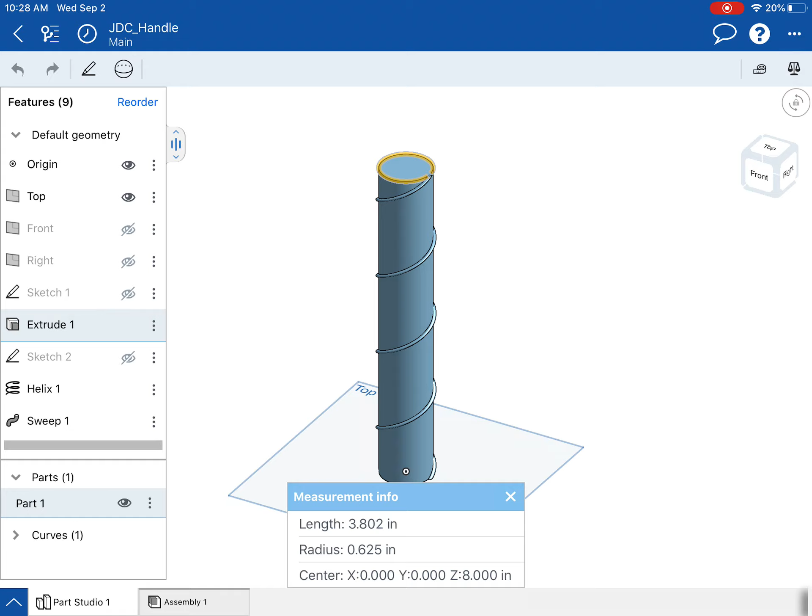It's interesting that it gives me a radius. Usually it'll be a diameter, but 0.625. So if we double that, we can get the diameter, which is going to be 1.25. So diameter 1.25. Remember that. So we're going to go back.

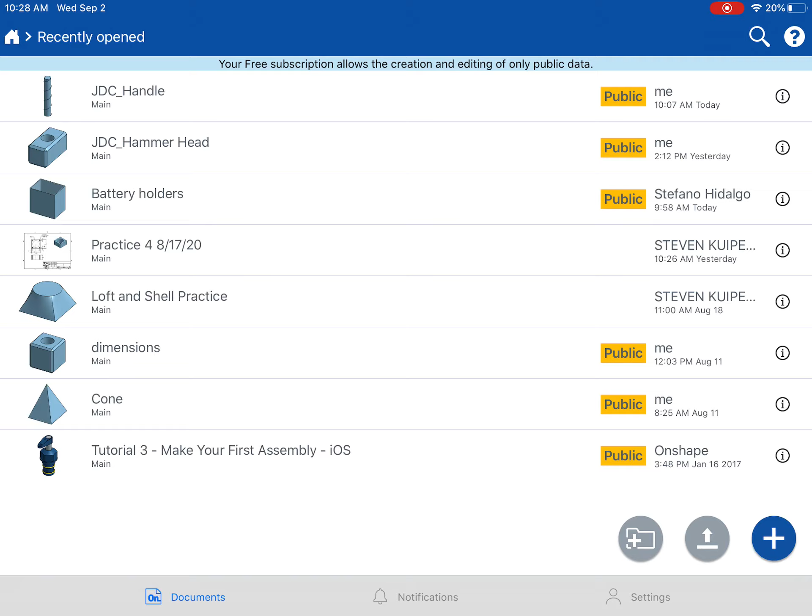I'm going to make a new document. Hit the blue plus sign. And remember initials, and then underscore. And we're going to call this Pummel. Like that, I think. Okay. And then we're going to now model our pommel.

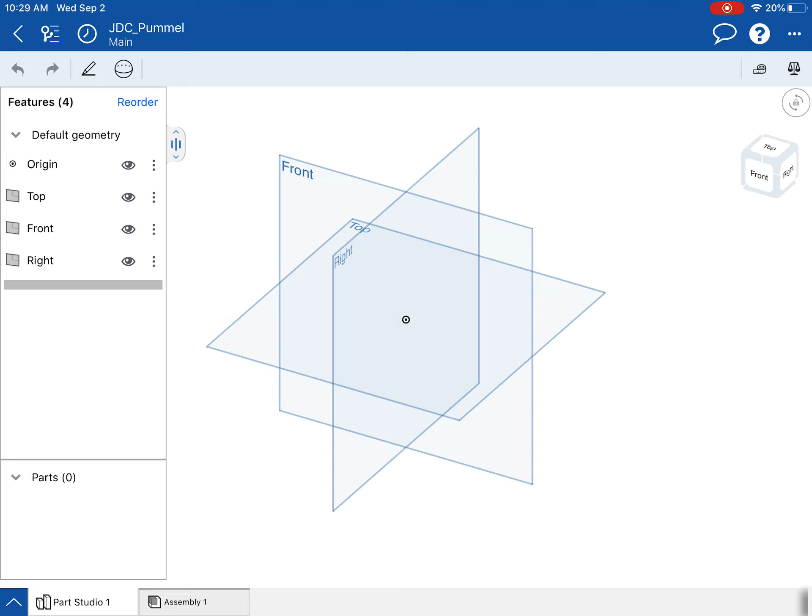Let's see. Yeah, let's start on the top again. I'm going to start on the top plane. So I'm going to turn off my front and my right. Remember, you can turn the visibility on and off of those anytime you want with the tapping of the eye next to whichever plane you want.

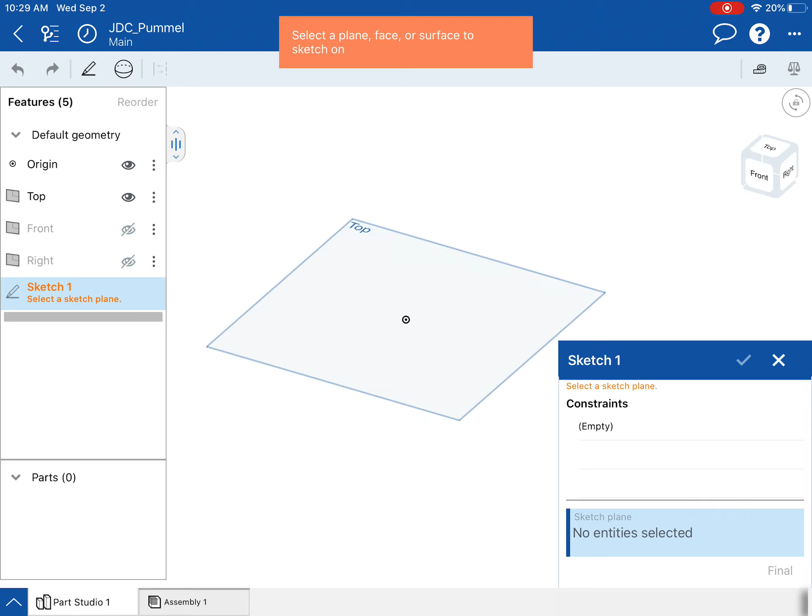And I'm going to start a new sketch. The pen icon, the 2D tool, I'm going to tap on that. It's going to say select a plane, select a face or surface. I'm going to tap on the top plane. Once I do that, it opens up the 2D menu where I can start sketching.

And the first thing I want to make is a center point circle. That's going to be this one. Tap on that. I'm going to tap on the origin. Remember, always start on the origin for your first sketch. Tap on the origin. I'm going to tap and drag, and randomly create a circle. I'm going to now dimension that.

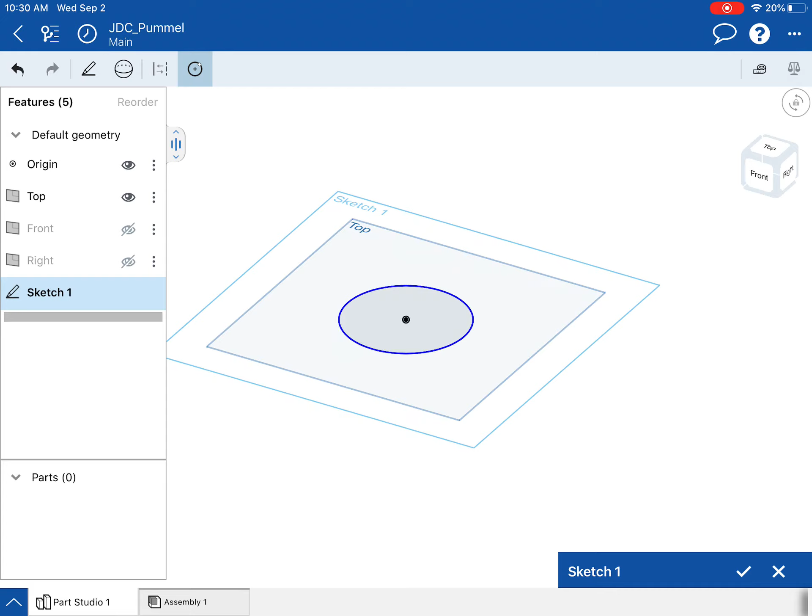Remember, dimension is going to be underneath the 2D tool, the pen icon here. I'm going to tap on the pen icon, and dimension is located right here. Tap on that, and then tap on the edge of the circle. Once that happens, the number comes up. I can tap on this and change that diameter.

Now, the handle diameter was 1.25, so that's what we're going to make this as well. Actually, let's do a subtraction extrusion later on. So let's make this a little bit bigger. So we're going to do, let's say, a diameter of 2 inches. So we're going to go 2 and then the green check mark.

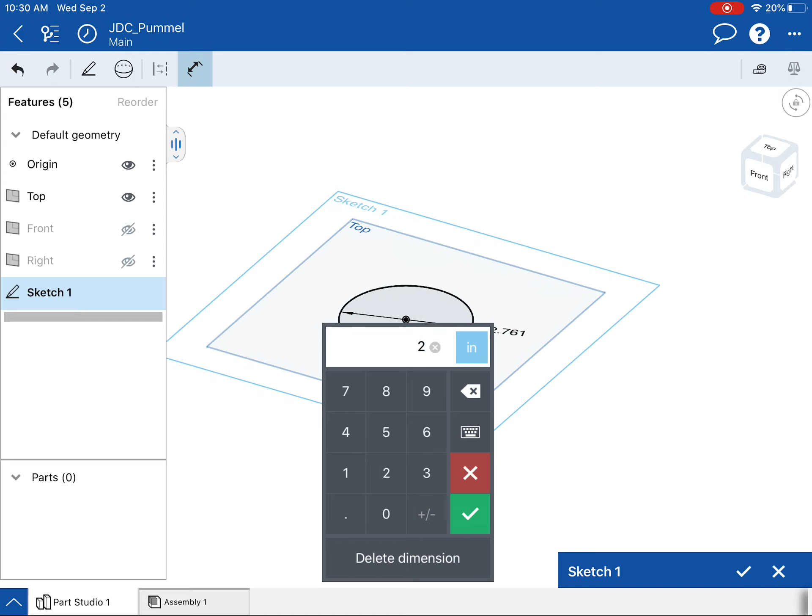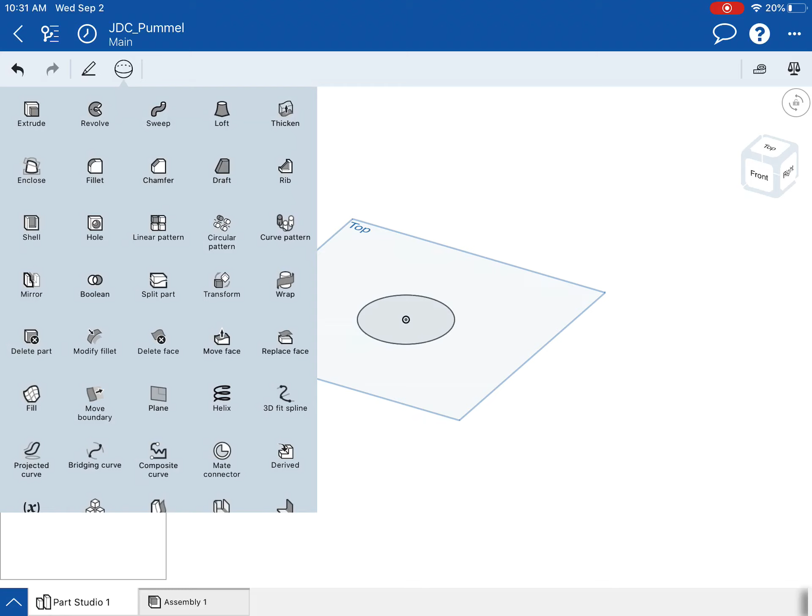And then we are going to draw another circle. Let's practice with extrusion. First, I'm going to extrude this. So we're going to finish the sketch and extrude this. So I'm going to tap on the sphere icon, the 3D tool, and go to extrude.

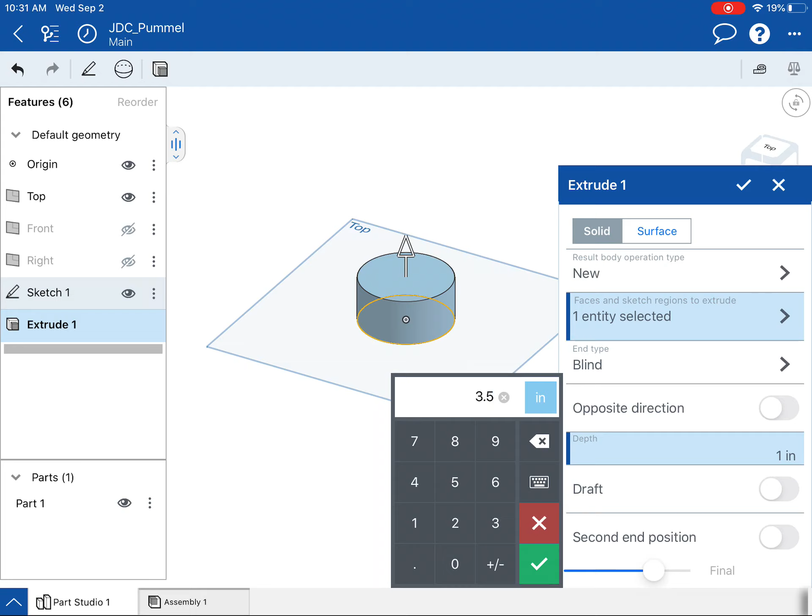I tap extrude. I'm going to tap on the circle I made, and it knows that I want to extrude that circle. I'm going to extrude this up about 3.5 inches. I'm going to hit the green check mark. And now I'm going to create a new sketch on the top surface of this cylinder.

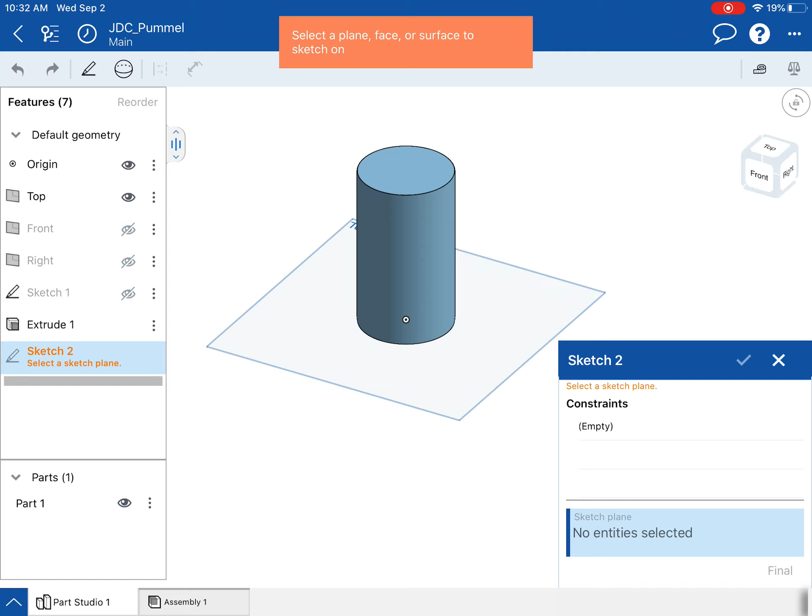So I'm going to make a new sketch by tapping on that pen icon. Once I do that, it says select a surface, select a plane, select a face. The face I'm going to select is the top of the cylinder. Once I do that, I'm going to be able to draw another circle inside of this cylinder surface.

So I'm going to go to center point circle, which is right here. And I'm going to do my best to tap on not the center, just because I want to show you guys something. So I'm going to tap like over here, not the center of that cylinder. And then I'm going to tap and drag to make this circle.

And you can see that square; there's going to be some snap-ons where it snaps to a point. Right there, it's snapping on so that the edge is connected to the center of my cylinder. So I don't want that. So try not to have it snap on anything. So right here would be good, and right here would be no good. You don't want any kind of constraint added to your sketch yet.

So that would be like a geometric constraint. We don't want that just yet because we're going to be adding our own in just a second. So right there, I'm going to let go of my circle.

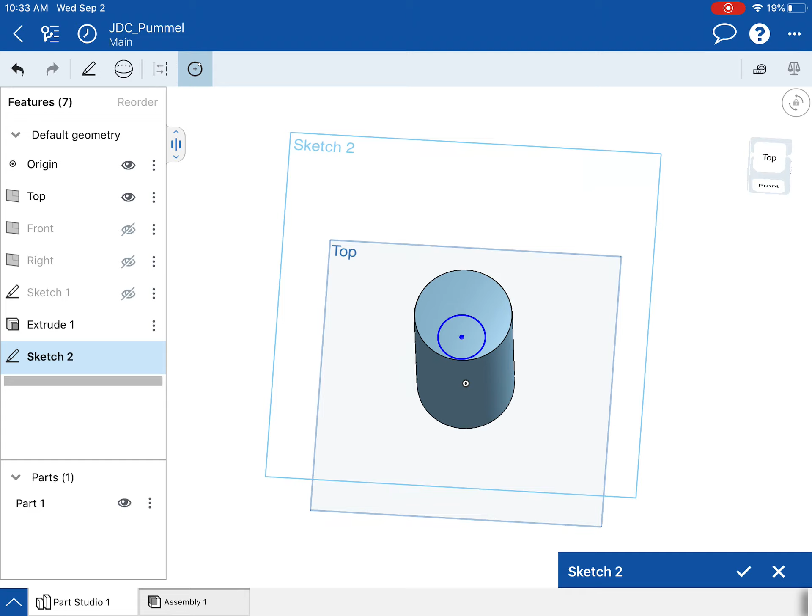Again, if you mess up, if anything happens like that, you can always undo. Undo is at the top left. You can see right there the arrow going back. If I tap that, the circle's gone. I'm going to have to draw that again. And tap, draw, and again, I'm getting some snap-ons.

Right there's good. So first thing I want to do is I want to make this go to the center. So I'm going to add a geometric constraint. I want to snap on the center point of that small circle. I want it to be concentric with the bigger cylinder.

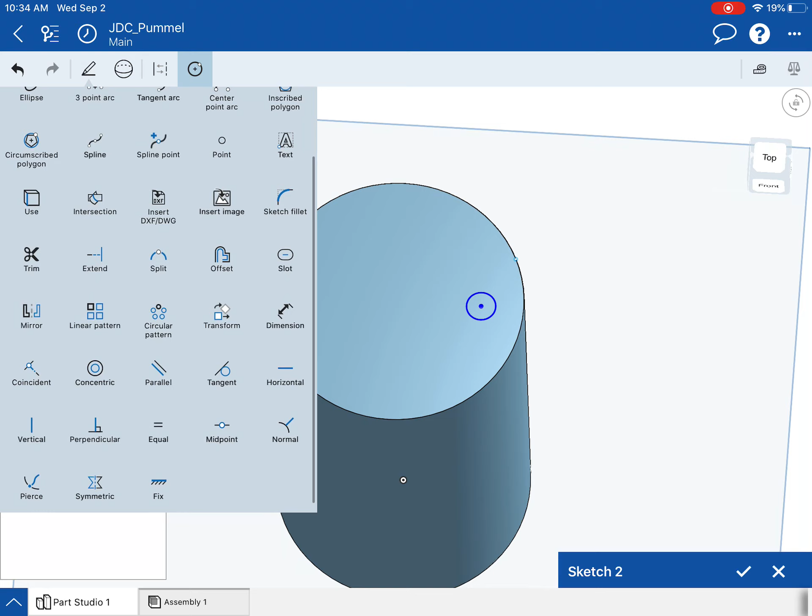So what we're going to do is we're going to add a geometric constraint by going to Sketch, the little pen icon, 2D sketch mode, and somewhere in here at the bottom there's going to be this concentric tool. You can see it right here. And that allows, if you have two circles, they will make it so that the circles share the same center point. So if I tap on concentric, it says a constraint must involve something from the sketch.

So I'm going to go to that center point and, whoops, hold on, that didn't work. Let me try that again. So I'm going to tap on the circle first. Maybe let's try that. So I'm going to tap on the circle, and then I'm going to go to 2D, and then I'm going to go to concentric. What if I do it like this? There we go. Okay, so that took me a while.

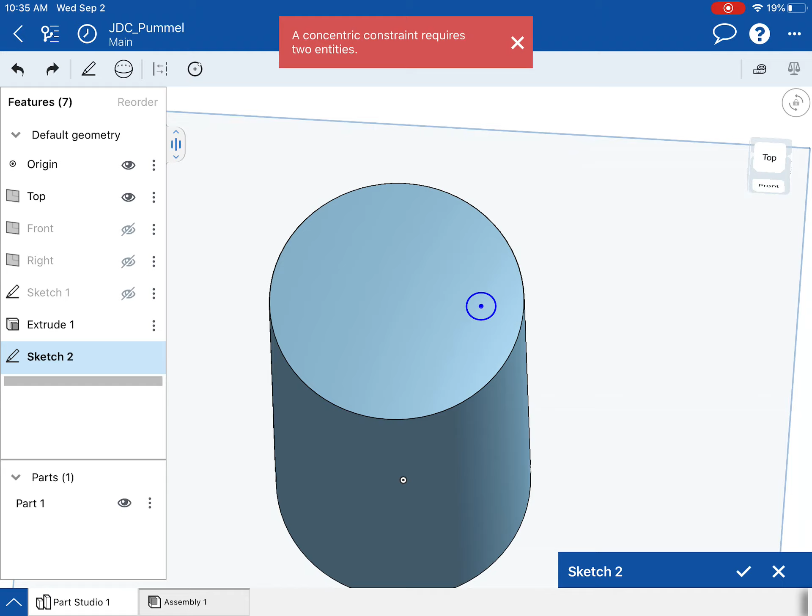A little bit different than Inventor, right? So I'm going to undo that one more time. So say it's off-centered. I guess with the proper order of things, proper order would be to select the two geometric shapes that you want to add a geometric constraint to.

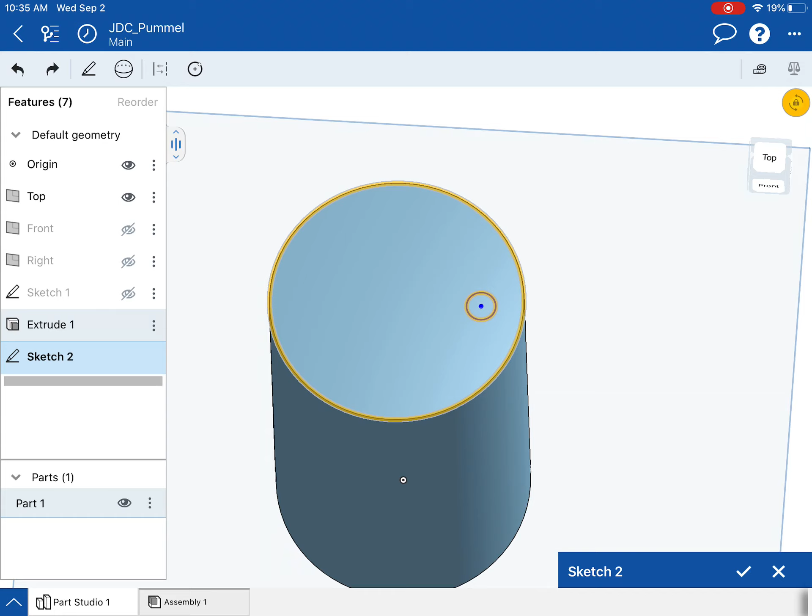So in this case, I'm going to select the two circles. The geometric constraint that I want to add for those two circles is I want them to be concentric with one another. I want them to share the same center point. So once they're both selected, then I can go to the pen icon, the 2D tool, and now I can tap on concentric. Once I do that, watch, it snaps on to the center. That's all I wanted. I know it took a little bit, but that is what we need to do.

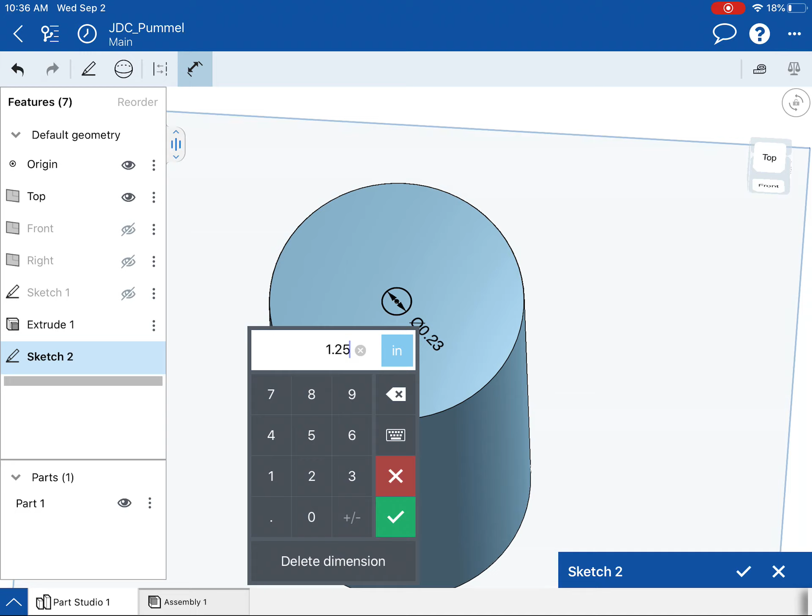So now, after that, now I can go ahead and dimension this. So I'm going to go back to my pen icon, 2D tool, dimension. I'm going to tap on that small circle. It's only 0.23 in diameter, so I'm going to change that. Remember, our handle is 1.25. So I'm going to change that to 1.25, green check mark, and there it is.

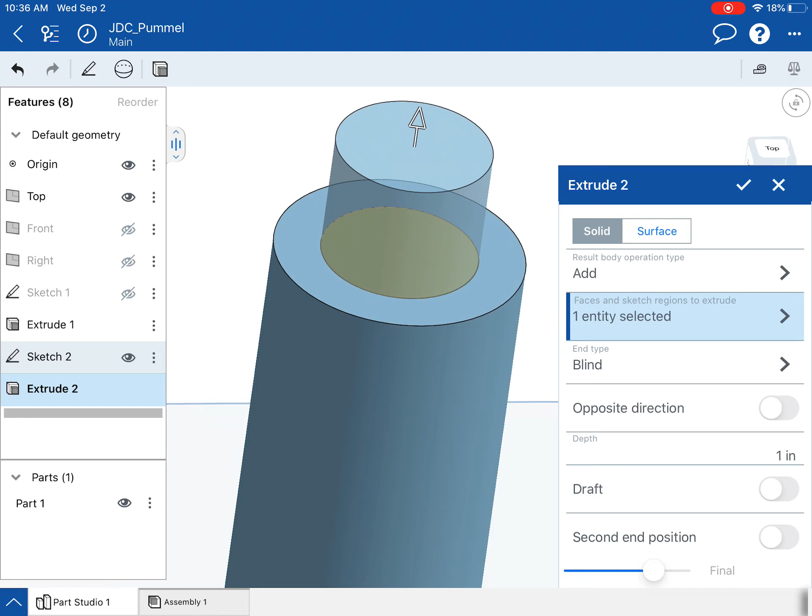Now what I want to do is I want to cut that away because I'm going to insert the handle into this pommel. So what I'm going to do is I'm going to extrude. So I'm going to use a 3D tool, the sphere icon. I'm going to extrude. Onshape is pretty smart, and it knows I automatically want to extrude that circle.

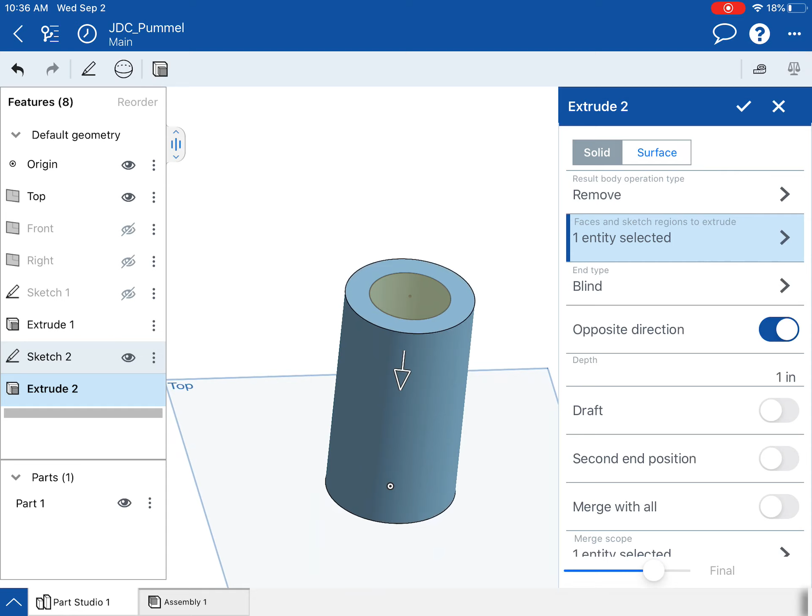The one thing it doesn't know, though, is I want to take away. I don't want to add. So over here, result body operation type, where it says add, I'm going to tap that, and I'm going to be able to change that to remove. It's going to then move it down, and since we extruded this 3.5, how about we extrude cut this away 2.5, so there's about an inch left at the bottom. So we're going to type in for depth, and so once I change direction to remove, I'm going to depth instead of 1, we're going to do 2.5.

And blind is fine as the end type. So what blind is, a blind hole. If you look down that hole, you can't see through it. You're technically, it's a blind hole, right? You can't see through the other part. A through hole would be if you could see through it, they'd be extruded all the way through.

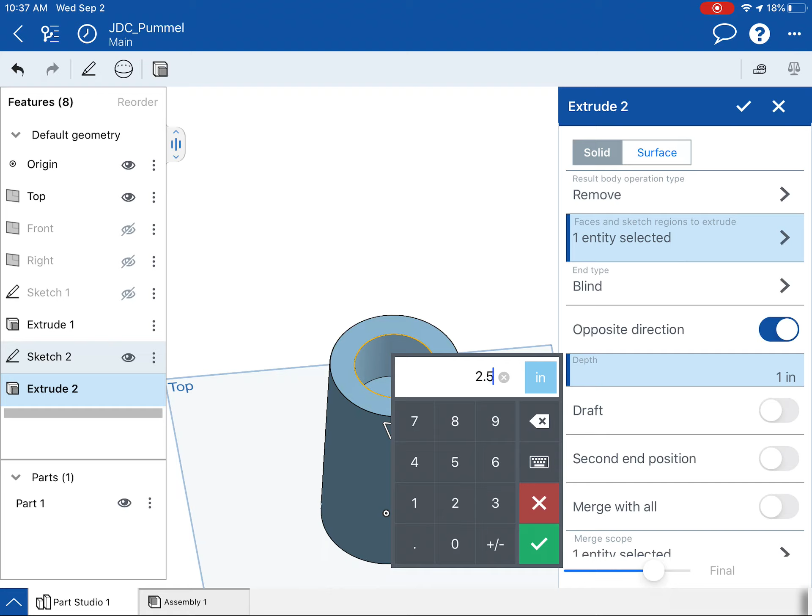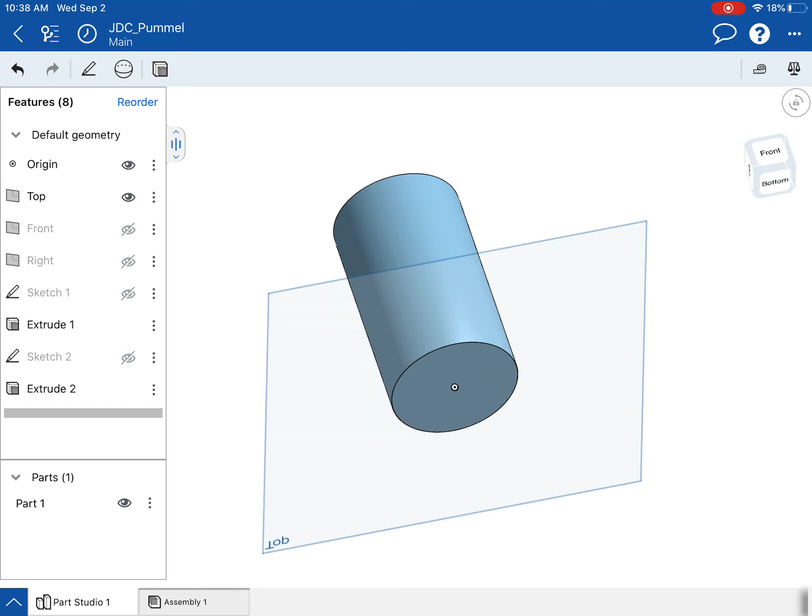So I'm going to make it blind hole, depth 2.5, green check mark, so that extrudes it down just enough so that my handle can fit in there. And then again, just like everything else, I'm going to make it look pretty, add some detail to it. And what we're going to do here is we are going to make a circle on the bottom surface. So I need to make another sketch. I'm going to go to my pen tool, and I'm going to tap on the bottom surface.

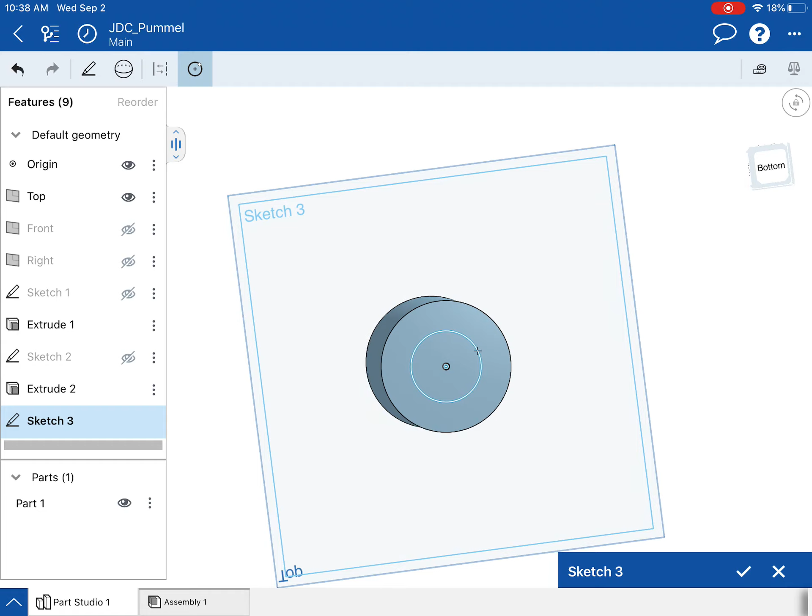Because we have the origin point, we're going to use that to our advantage with our center point circle. We'll start on the origin, tap and drag to make a random size circle, then go to dimension and tap on that circle to dimension it.

Let's say 1.25, and we're going to hit the green check mark.

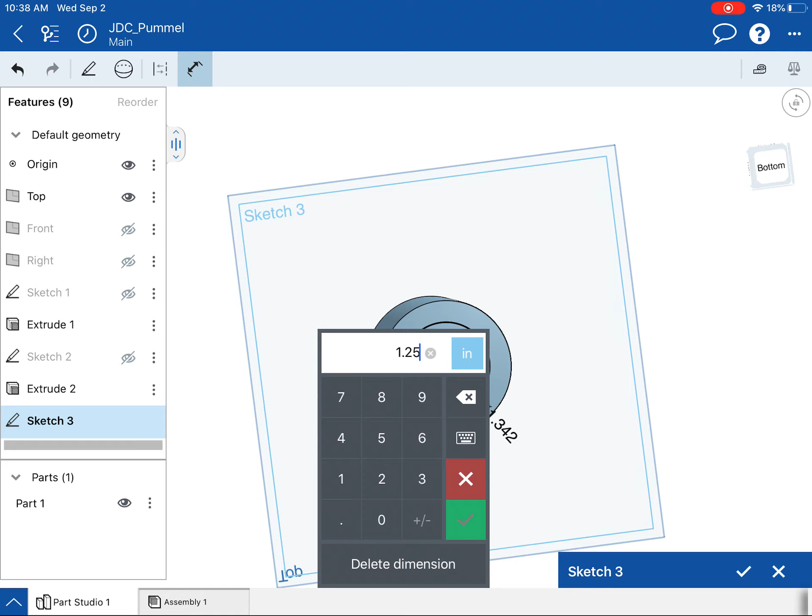Now I'm thinking that might not be big enough. This is what's really cool, you can always go back to your dimensions and change them again. So that 1.25, I can tap on it again, maybe double tap, triple tap I think, and change that to 1.75, then green check mark again.

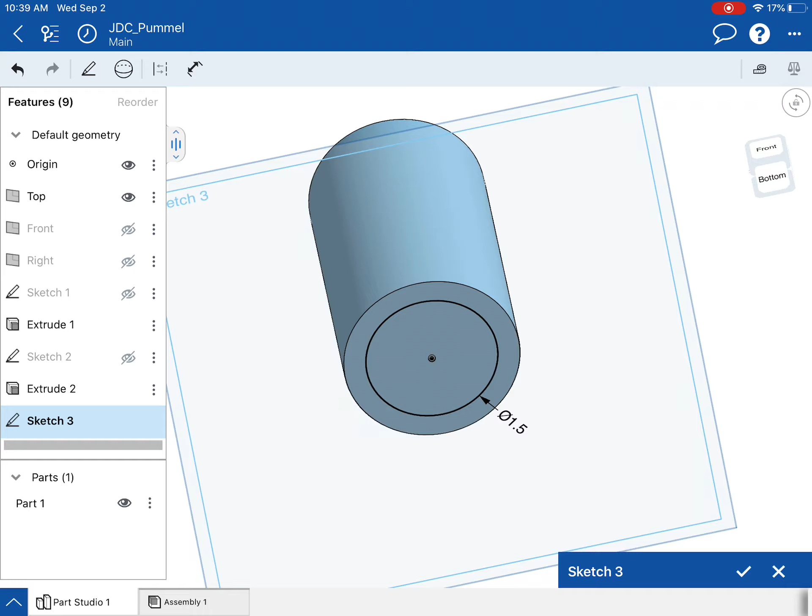Now it's too much. How about 1.5? That looks perfect. So now 1.5 is the size of our new circle.

What we're going to do is extrude. We're not going to extrude this inner circle, we're going to extrude the ring around it. You'll see in a second, I'm going to go to extrude.

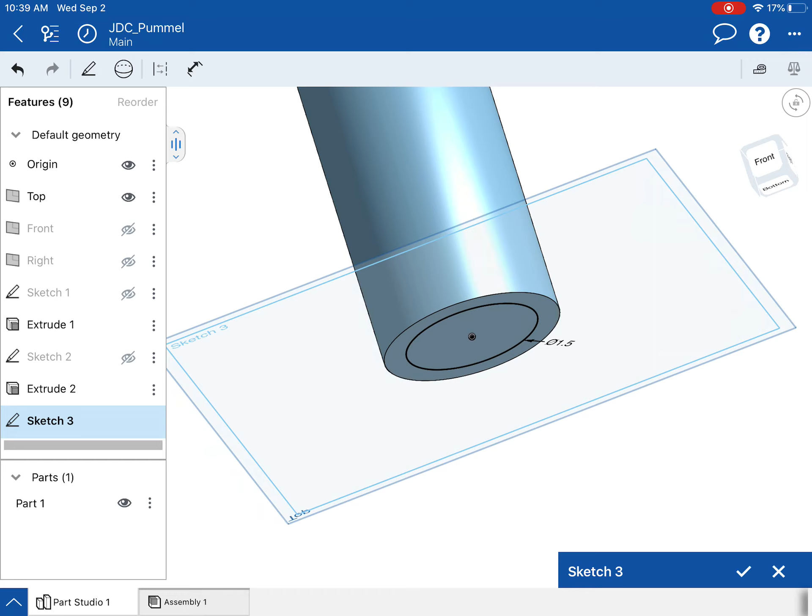That's a 3D tool. I'm going to click and tap on the sphere on the top left, and extrude. Now that surface it assumed I wanted to extrude is not actually what I want. I want to extrude the ring around that, so I'm going to tap that ring instead, and tap that circle

to deselect it. Let's try that one more time, that looked a little confusing to me. So I'm going to go back to extrude, and now nothing's selected.

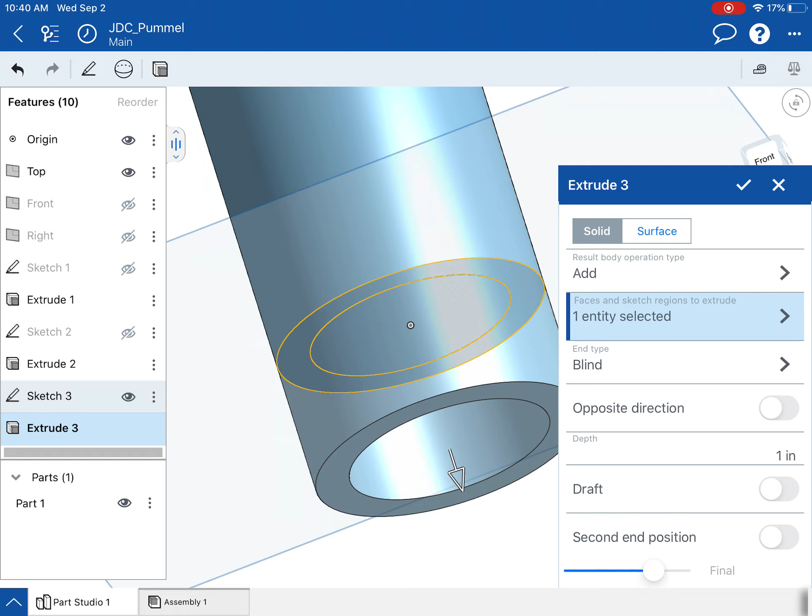That's good. I'm going to tap on the ring here, and it looks like it wants to add. I actually want to remove again, so I'm going to go to remove.

Okay, just like that, and now 1 inch. I think that's actually good for once, we don't have to change the depth.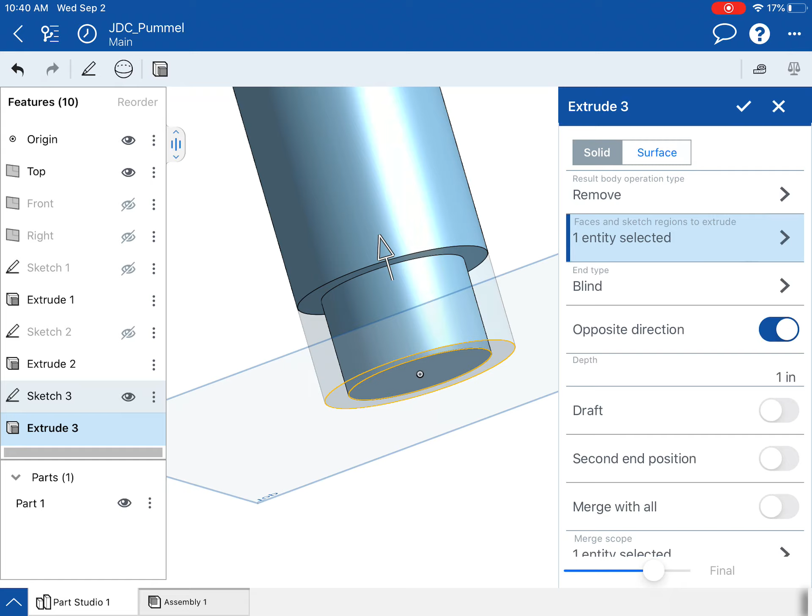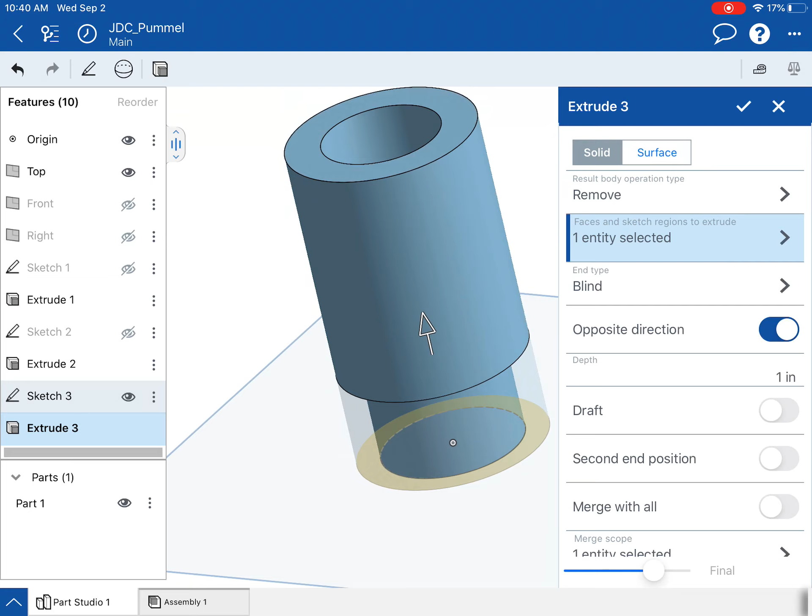I'm going to do that one more time since it looked confusing and didn't react the way I wanted. So what I did is I went to extrude, selected the outside ring. It assumes I want to add, but I actually want to remove. Now that's exactly what I want. It doesn't look quite right now, but it will in a second, trust me.

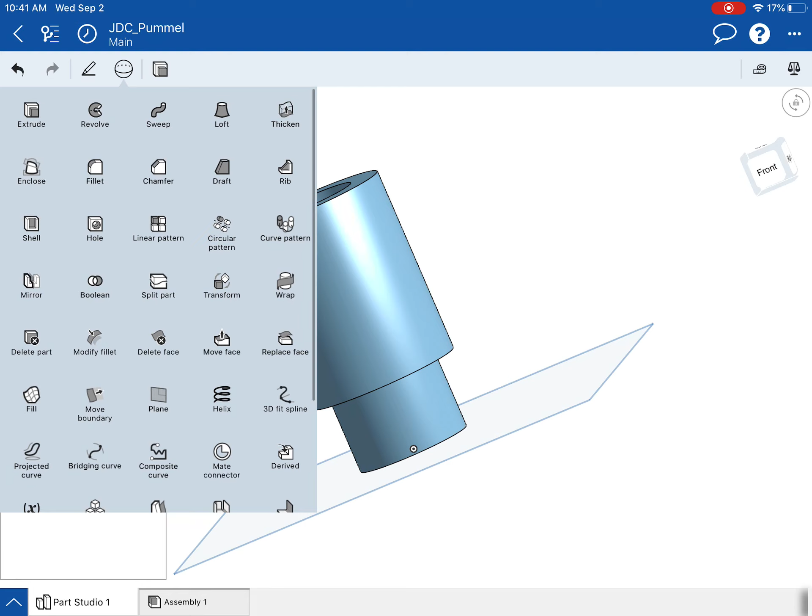Now I'm going to hit the check mark by extrude 3, and now we're going to add a fillet, a couple of fillets. I'm going to go to my 3D tool, go to fillet. It's not fillet like Chick-fil-A, it's fillet.

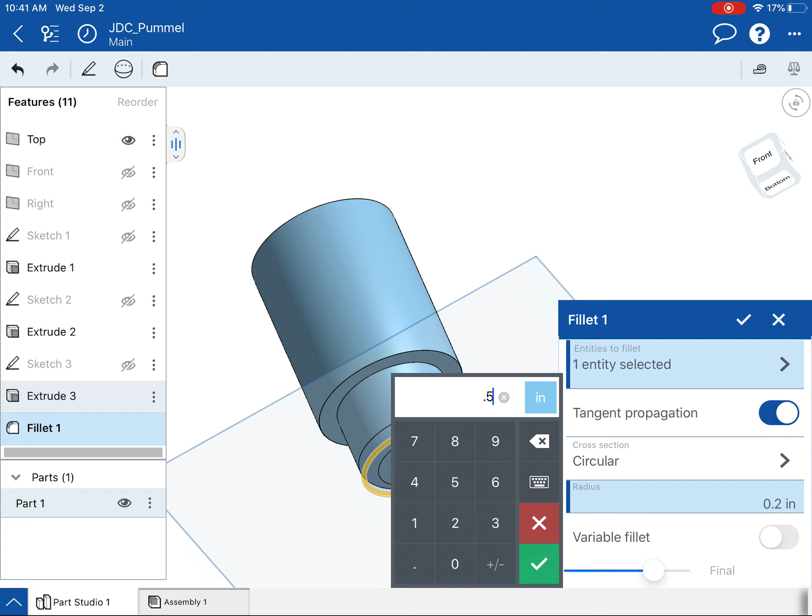Right there. Now I'm going to tap on this bottom cylinder edge. You can see that changes it a little bit. I'm going to increase my radius of that fillet to about, let's say, 0.5. Let's try that. That looks pretty cool.

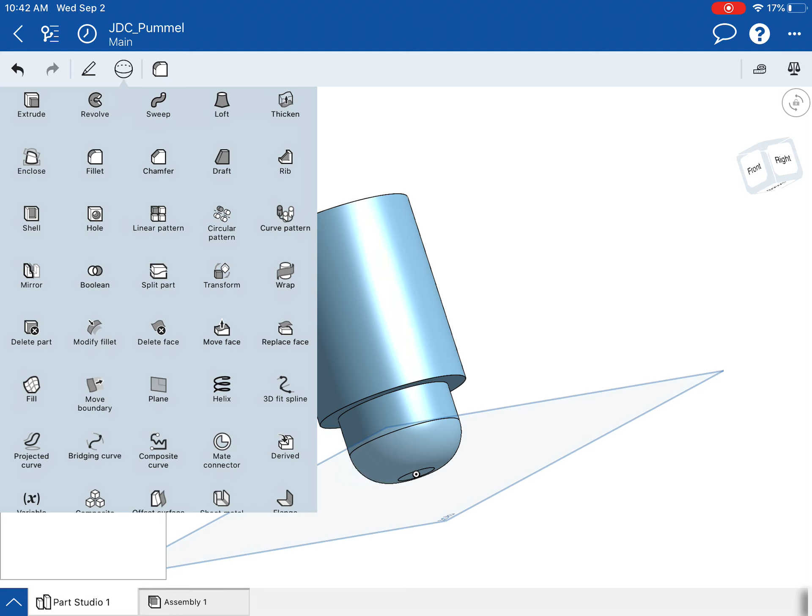And then I'm going to hit the check mark on that fillet, and add a separate fillet to that outer ring, that larger part of the cylinder. So I'm going to go again to 3D, the sphere icon, go to fillet again, and tap on the larger cylinder edge. That one is just going to be a bit smaller radius, instead of 0.5, we're going to do 0.25. Check mark, and there we go.

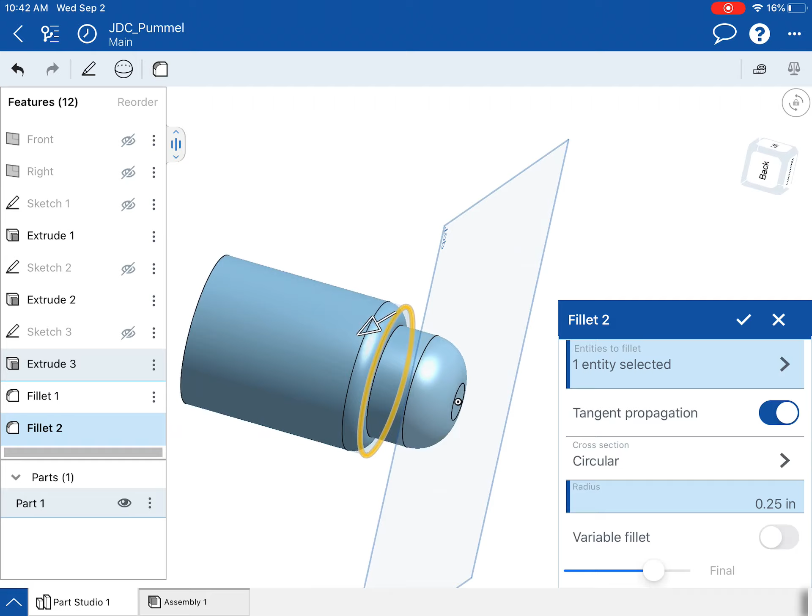That looks a little bit nicer. All right, and that is it. Later on, we'll be able to customize our parts a little bit more. So if you ever want to go back into this and change things up after the fact, after it's all said and done, we can always do that. But right now, that's kind of what we're looking for.

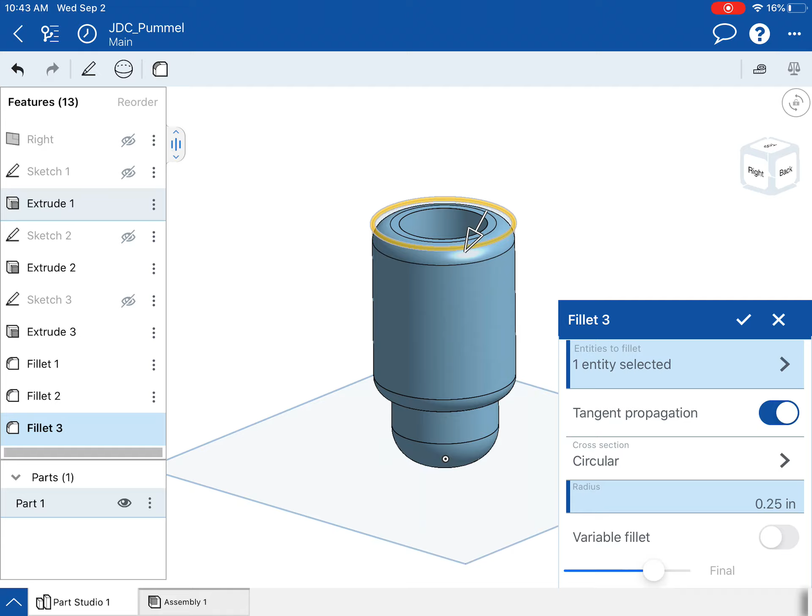If we really wanted to, I know I just said we were done, but you could also fillet this top edge if you were so inclined. Change that to maybe make it consistent with the other part, 0.25. I don't know, if you think that looks good, keep it. If you don't...

What the heck, let's do it. Fillet, right there, 0.25. We could always change it later. Maybe in class, if we say, hey, Mr. C, no, that doesn't look good, we could always just take it off. I'll show you how to do that later.

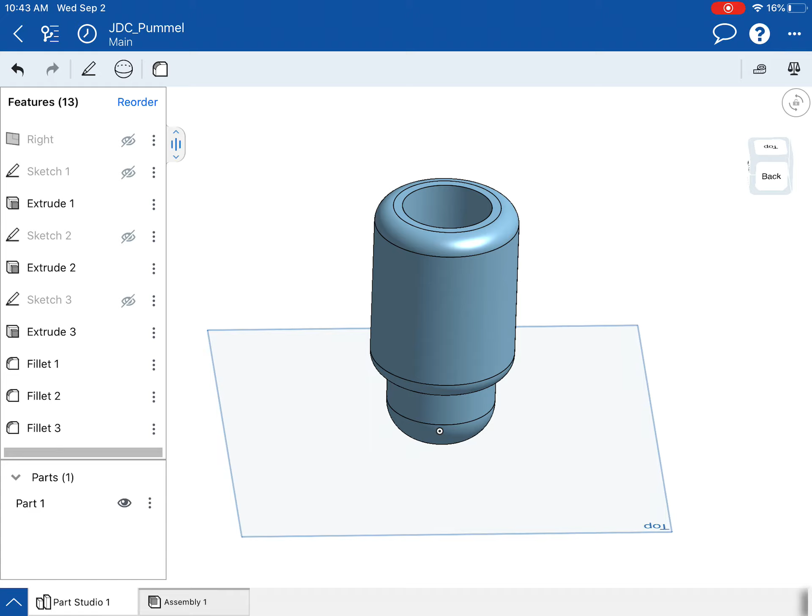Okay, so that is it right there. That is the pommel. Now we might attempt the strap, we'll see how that goes. If not, we can start assembling everything. We'll see you in the next one.